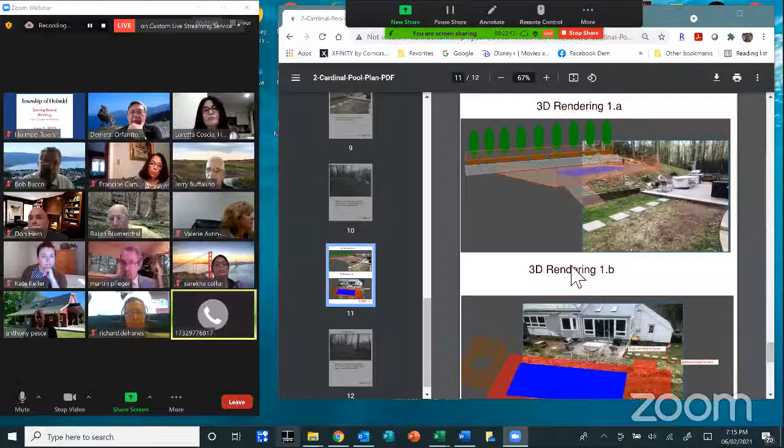Okay, can you see that, the top picture? I think this here really gives you a clear idea with the 3D rendering of what we're looking to do. You could basically see we have this small patio up at the backside here, and then we have that little front slope that would basically be handled with some large boulder wall across that whole front of that slope there. We have 3 loads of 3 to 4 foot diameter boulders being delivered for that, and we're starting some of this now, but obviously not the pool excavation, just some of the landscaping inside here to maintain retention and also to create a nice fall off for the rain garden where any runoff coming off of the patio would basically be captured into this rock placement. It's more of a placement than a retaining wall. Basically, the existing slope is going to remain, and we will address that with some nice sized boulders and then some ground cover inside there, like mountain pinks or something that will grow between the rocks. That would really capture the bulk of the runoff coming from the south to the north on the property.

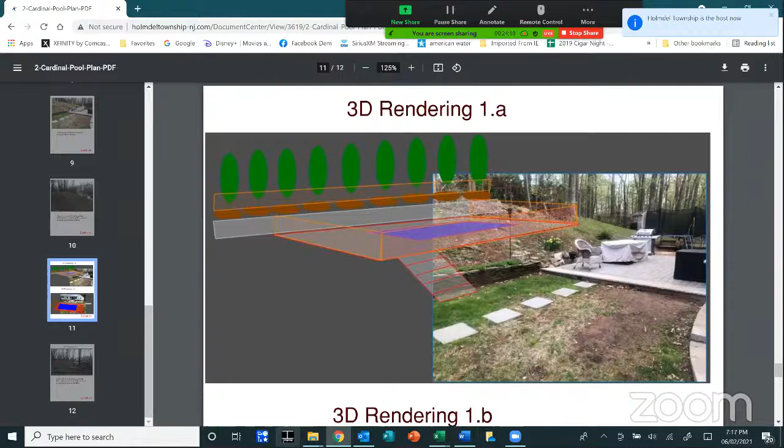Off to the east side, which would be the left of the screen, there would be, and again on one of the other plan views, there's a landscape bed up inside there as well, that would be behind it. Actually, it's not that exhibit, it's the topographical, not the topographical, but the actual plan view of the survey. Yeah, I think try 4. I'm moving there.

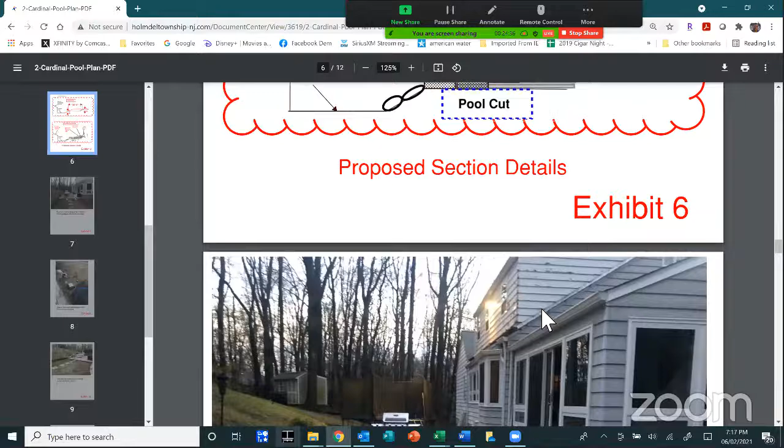Right, that one, exhibit 4. If you see, to the left of the pool, by the evergreens in the back, there's a little curved line where it says new landscaping bed. That will basically capture any runoff coming in that direction.

That would just be some ornamental landscaping inside there. The retaining wall is basically a 3-foot retaining wall. So we'd have a 5-foot step up to the grade of that elevation where the pool would be, the plane of the pool. In the back, there'd be a 3-foot retention wall with about a 10-foot buffer off of the property line.

That gives us some distance from the property line, and a nice evergreen privacy screen back there, along with a 6-foot fence we plan to put along the property line, to create some good privacy between us and our adjoining neighbors, who have a pool on their opposite side as well, without disturbing too much of the grade. That was really the biggest challenge for us - how do we get a pool in here?

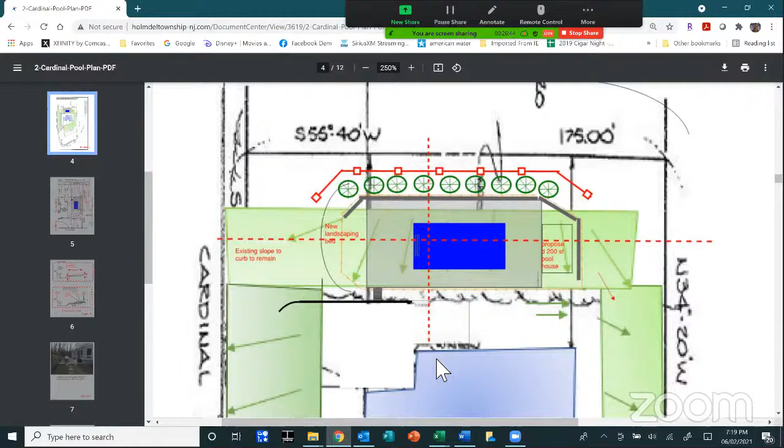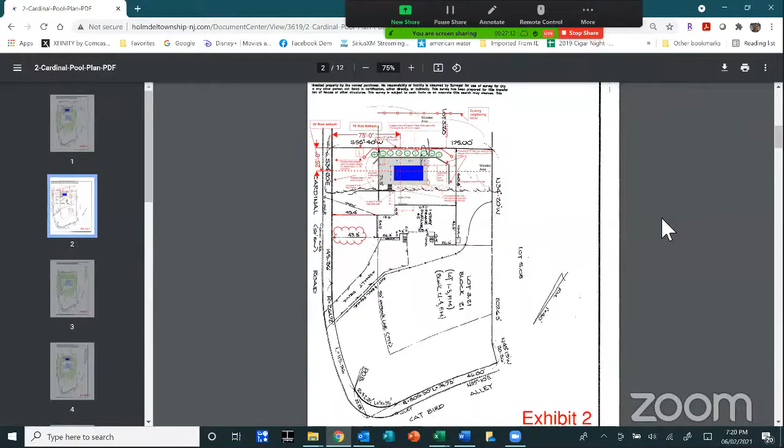If you could just scroll to the topographical that we did. I believe it was the first exhibit, if I'm not mistaken. No, not that one, I'm sorry - I don't have the catalog in front of me to see what number exhibit. Keep going - no, there's another one, keep going.

That one right there. So if you blow that up, and blow the backyard up a little bit, you could kind of see where we have - if you bring that up a little bit, you'll see our patio is basically set at ground zero, basically zero elevation, grade elevation.

If you look at the topographical, in that high hump in the middle there was a tree that rotted out that we lost, and that's the remnants of that tree stump that's going to be removed and graded down. But you'll see, in all practical purposes, that 8-foot grade in the back there is basically the level line of the adjacent property.

So we'd be dropping 3 foot from that 8-foot grade down to about a 5-foot level off of our patio, which really minimizes the disturbance of that whole area and maintains all the - basically where you see the 5-foot grades along there, that's like the ground zero for the base level of the pool itself, and takes up that footprint.

You can see our property is kind of sloped in many different directions. We're not really going to be impacting anything outside of that area there. What we're planning on doing with some of the soil removed from the higher point of the excavation is, to the right side of the corner of the house, building that grade up a little bit to flatten it out and lessen the runoff inside there, since there's a natural runoff.

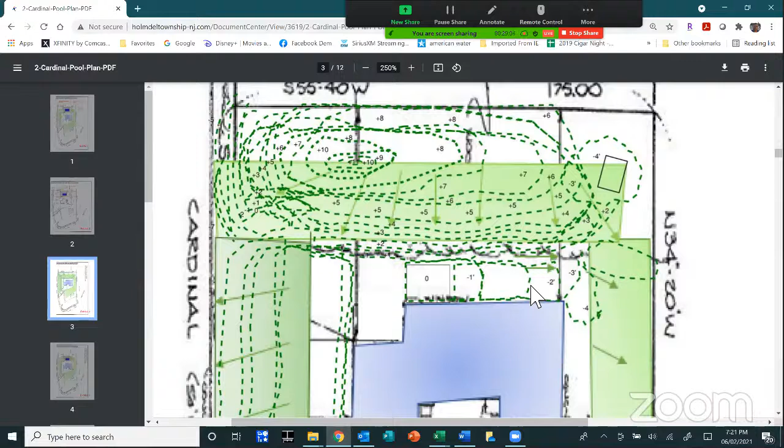If you see on that right side, it drops from 6, 5, 4, 3, 2, 1 pretty fast down that side to a negative grade, then a slope all the way down into a swale that runs between the adjoining properties. That lot 5.08 is the backside of Timberdale, whose property runs all the way out to Catbird Alley. There's basically a big swale that runs all the way down to the spillway below, which runs parallel with Catbird Alley all the way down to Crawford's Corner Road. So we think - and again, we have no other location on the property.

Our coverage is way below the required coverage. I did post some lot coverage square footage here that shows us well within the lot coverage limits, even with the pool and everything. We still probably have about 3,000 square feet of additional area we could essentially eat up in lot coverage.

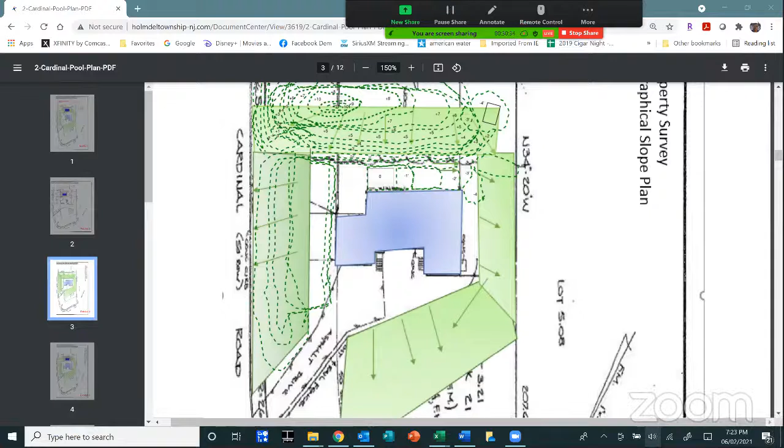We want to stay under 25%. We just want the board to know, I have a 13-year-old daughter who's an aspiring athlete. She's been on the USA team as a gymnast, and it's taken us to Russia and Portugal, and this is something we're looking to put in for her. I think we have, as a resident, the right to try to utilize the property as best we can, considering the challenges we have with this parcel because of the slopes.

If you look off the front of the house, there's basically a 40-foot grade that drops down there. The side grades are not as drastic, but the front is. So we really have no other place to do this, and to beautify the property and create some privacy between us and the neighbors in the back, we've really taken that into consideration with this plan. We're just looking for some comments.

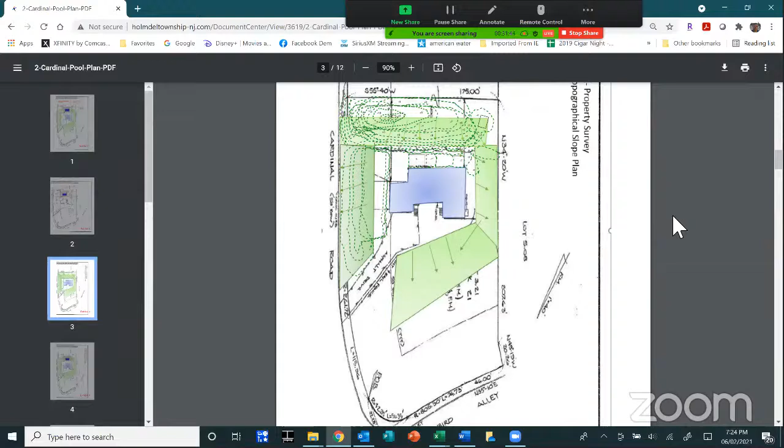And again, Bob, I know George was out there. We walked the whole site, and I think he was pretty confident in what we proposed to do back there, with really minimal impact to the property. So I'm interested in the team's feedback as well.

Richard, this is Dimitri. Why don't you go through all the exhibits, because I think a lot of the exhibits you have here would help the board members understand your property.

Sure, let's just start back with Exhibit 1, and we could run right back through the overall thing. Basically this outlines the setbacks, where it shows what we'd be limited to. The side setback is 75 feet off of Cardinal Road, and you can see where it positions us. A 25-foot setback would put us right up against our patio that's out there right now, which we're trying to avoid. Being too close to the house, I have a full basement downstairs, which puts us at a little bit of risk being that close, and I'd rather keep it a little further away. So that was one of the intents.

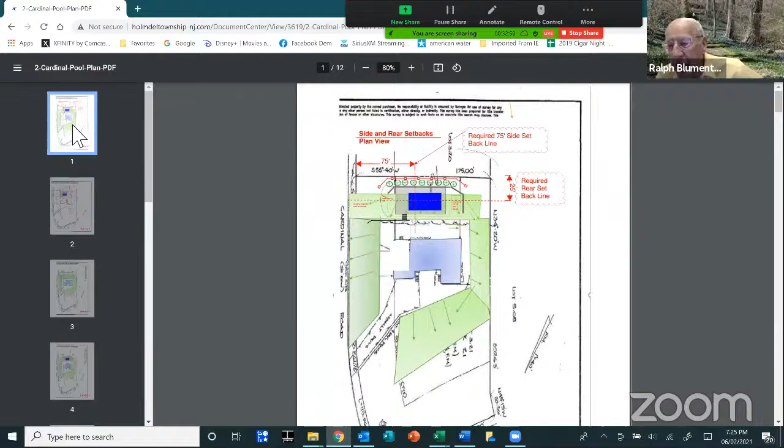If we go to Exhibit 2. I'll just make one comment here: the side setback issue is a common one for any lot that's on a corner, because of the way the Holmdel ordinance is written, it doesn't really work for properties like this.

Right, and Ralph, just to point out, the side of our garage is only 50 feet off the property line, so it's got to be kind of grandfathered in, I would assume, from the original survey and when the house was built. I'm sure the ordinances have changed over time, expanding that side setback from 50 feet to 75 feet, or the particulars associated with the new regulations on the 75-foot setback on a corner lot. So it certainly is a challenge.

And that raises a question that I don't know if the planner or the attorney can answer — that's a pre-existing condition, which is non-conforming with the current ordinance. Do you know if there was previously any variance granted for that? No, and obviously when we had our house surveyed... I really don't know, Ralph. I know we purchased the house in 2001, we've been here 20 years. There was never any comment when we made the purchase about the setbacks not being in compliance with the current zoning regulations. I don't know what year the 75-foot rule came into play in the township ordinance.

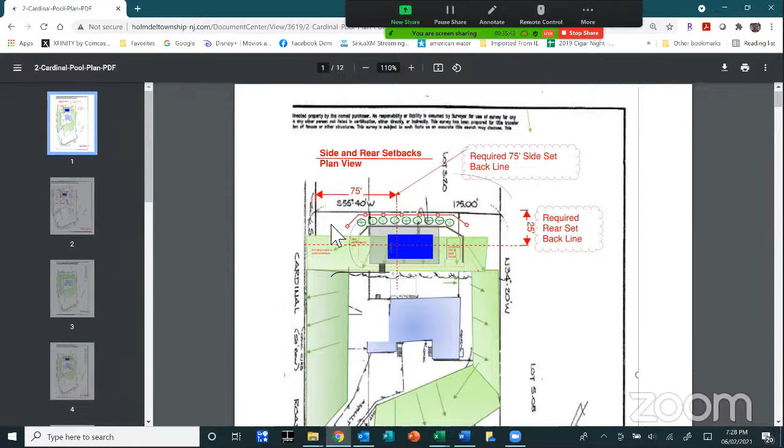Ralph, so we are 50 feet from the curb line to the side of the garage. And are we using Cardinal as your front yard, or is that your side yard? Well, that's a whole other question.

What's your address? Well, let's put it this way. The mailing address is Cardinal Road. So I would assume that would be the front yard. The driveway is going into Cardinal Road too.

Right, the house is positioned facing Cappard Alley. The front of the house is facing Cappard Alley. And this is the uniqueness of this property, with the side entrance and the setbacks. There's still a 25-foot side setback, so that would be 25 feet off of the rear. So if the rear of the house is actually the side, there would still be a 25-foot setback there that we'd need the variance for.

I don't know who determines the position of the house. We've always assumed the back to be the back of the property. Don't you have to go by the address? If you're on Cardinal, that's the front. There's a house on my street where the driveway's on the side street, but the address is the other street, so I think the address is a good indication of what's your front yard.

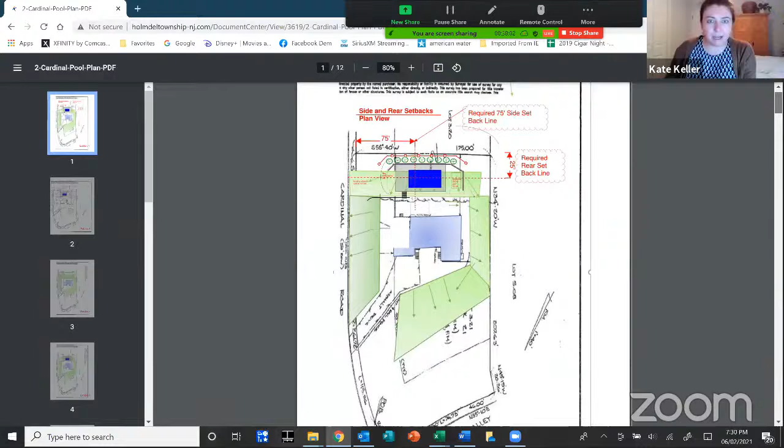That's one of a few different ways it can go. I think that's generally how it works, and the ordinance has some provisions on how to determine that. However, this property is very unique because the way it usually works with corner lots is that the side that abuts the side yard line of a neighboring property is considered the side yard. So in that case, it's a little confusing here.

Also, two front yards are required in terms of the setbacks. So I think that because the house next to it fronts on Cardinal Road to the south, that's a side yard too. So I think the determination that the side yard is in the rear is appropriate here. I agree with that.

So I have a question, if I'm reading the diagram correctly. If you were to meet the setbacks, it would take about a third of the swimming pool away, maybe even more?

Oh yeah, it was. Again, if I met the setbacks, the biggest thing I'm concerned about is the soil disturbance we'd have to cut out and the massive retaining wall we'd have to put up behind there, which would be like having one of those sound barriers built when you're next to a highway behind your property after you've moved in. So it's not something we really want to consider, and that's the reason we've been trying to implement this plan with the property, given the limitations.

We're very, very limited here with what we could do.

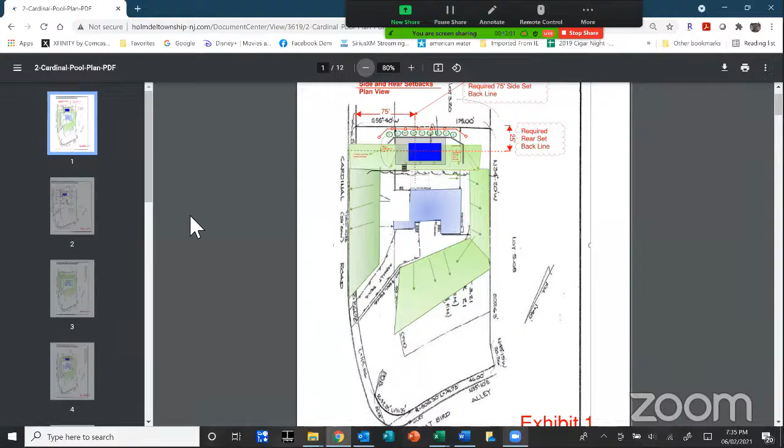So you would have to address the runoff onto your adjacent lot, your neighbor there, lot 5.08. I'd like to see a grading plan that shows that, with the boulders and everything you have proposed and testified to. I just want to make sure that the additional runoff from the way you're grading your property doesn't adversely affect that property owner.

I'm fine with that. I think that, for every intent and purpose, that can be done for you guys. Now also, if you're only going to be building a 3-foot high retaining wall, that's fine, but if it goes past that, you do have to have an engineer sign and seal drawings for anything that exceeds that.

Understood. So that's what gave us the flexibility. I worked it back from the high point of the common area in the back of the lot, adjoining our neighbor, to not create any disturbance back there and work that grade down. That's where we felt the 3-foot drop would put us at about 5 feet above our grade, with a nice little stairway up there.

It gives a nice architectural boulder wall in front that doubles as the spill-off for the rain garden in front. On the other side, where we're proposing the pool house, that side will be stone. We anticipate the grade from the patio to the retaining wall will basically be encompassed with a couple inches of stone, and we could incorporate more crushed stone below that to help absorb some of the water in that area.

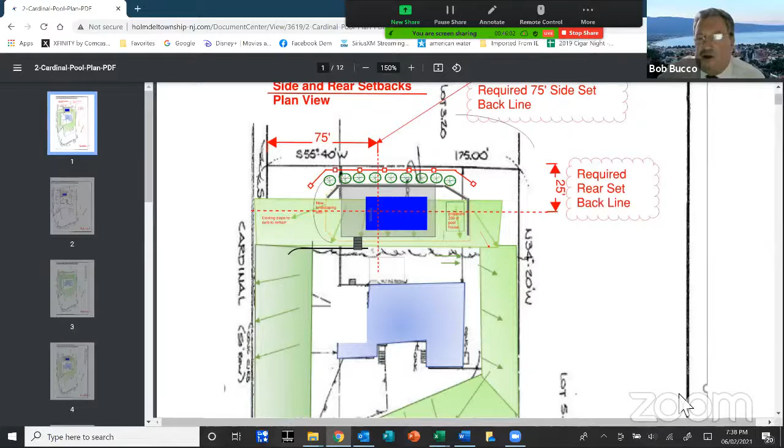That's correct, yes, I'm aware of that as well. You'll have another check, another check on the soil stabilization for the construction he is proposing.

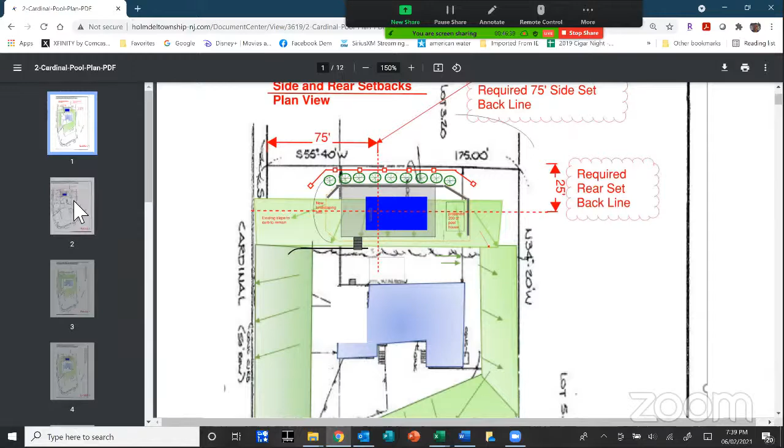I have a question. The rear part of the yard, is it currently higher and sloping down towards the back of his house? By putting in the pool, are we getting rid of some of the height of that hill, or is it already at the same level where he's putting the pool in? Well, where his retaining wall is proposed, that brings it up to the natural grade. Okay.

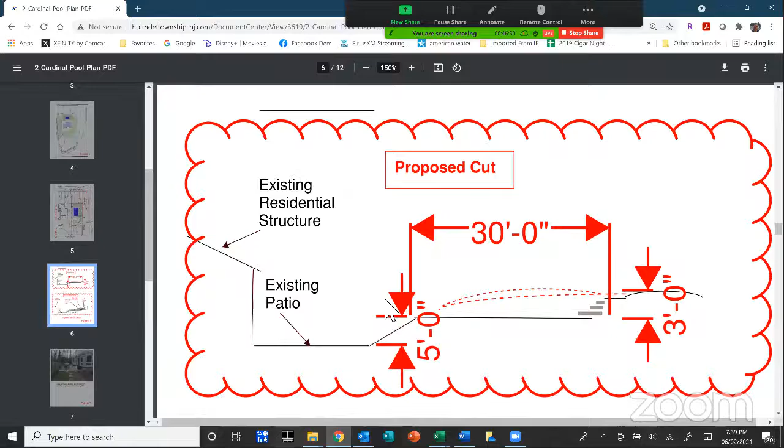So there's a cross section in there. If we scroll down to another couple of exhibits, that's one of the cross sections here. It basically shows both of those there, basically what we're proposing.

You can see to the left the existing house, the existing patio, and a little bit of boulder wall up there. There's about a 5-foot step up in elevation, then the flat ground which is the patio, and then the retaining wall with the fencing stepping as well, and then the tree buffer behind there with a 4-foot high fence to deal with that.

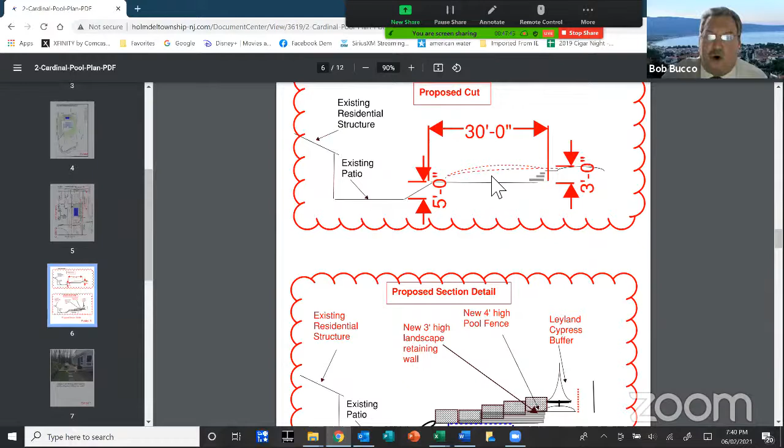On the exhibit above, you can see where the existing dotted line reflects the current soil and elevation, and what's being cut out of there. What happens is the retaining wall brings it up to the existing grade, so anything in front of the retaining wall is going to be disturbed basically.

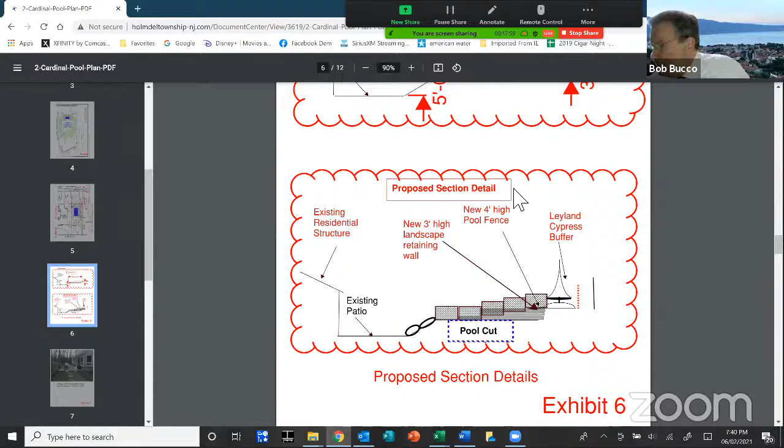So if we go back to exhibit 4, it's basically like a 30 by 60 cut at 3 foot in that area inside there. You'll see the trees and the fence he proposes are going to be on natural grade. All of where the pool is, where the proposed pool house is, that's all going to be disturbed, inside the retaining wall, basically the gray solid line.

Everything outside of that is really just going to be kind of graded out, minimal grading just for landscape purposes. There's no excavation planned, we're just following the natural slopes on both sides. So there's little impact on that side.

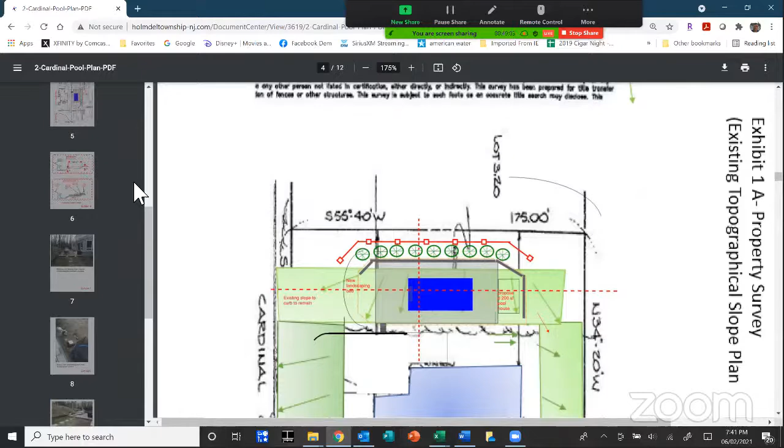On the east side right now there's a huge slope, and we're actually cutting that down by eliminating that big hump in the middle where the tree is. We're getting that grade down to about a 5-foot elevation down to the curb line, and we plan on replanting some vinca inside that area to maintain ground cover.

It's been an easy thing for us to maintain up there, and it has great soil retention for absorption and any runoff. I've never seen water really pouring off that hill onto the street and flowing out greatly. The property kind of self-absorbs a lot of the runoff that generates from the slopes during rainstorms.

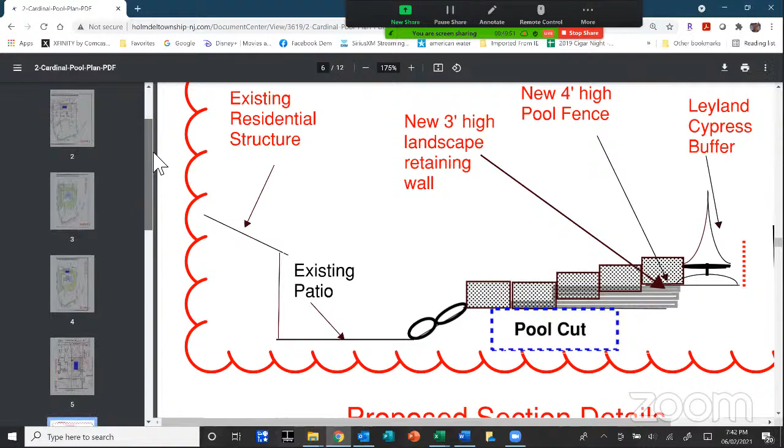Can you go back to that previous drawing? Which one, all the way in the beginning? That one is fine. This one? You want the contour lines or without? No contour, the one without showing the construction. That's exhibit 4. Yeah, this one.

Question here - the red line with the square posts, I believe that's where the fence is to be. Correct, that's drawn as being a few feet off of the property line. We have a 10-foot buffer we're going to maintain from the property line to the retaining wall there, and we'll have those evergreen plantings up inside there.

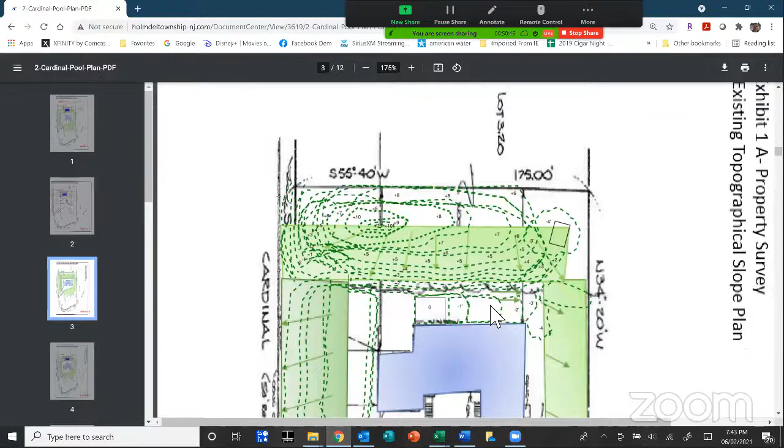My question is though, there's the requirement that you have a fence all the way around the pool. Yeah, there is. If you look at the other drawing - one of the other plans, I think it may be the first, number 3. This is number 4, more of a privacy fence rather than a pool fence.

You can see the red - I actually have a pool fence drawing, number 5, the brown one. You'll see there's a yellow dotted line that surrounds there, and that shows the proposed 4-foot high pool fence around that elevation up there.

So it's going to be at the high point of the elevation, the retaining wall in the back there, and then kind of follow the contour and step down along the sides, and then obviously level across the front of the pool elevation.

And again, we're trying to minimize the impact of what we disturb back inside. We love this two-piece property. It's a beautiful piece of property. We just want to try to get something in here for our daughter and for them, and for the family, to enjoy. We thought this was really our best route in handling this.

Do any of the other board members have any questions for Mr. DeHane about what he's proposing?